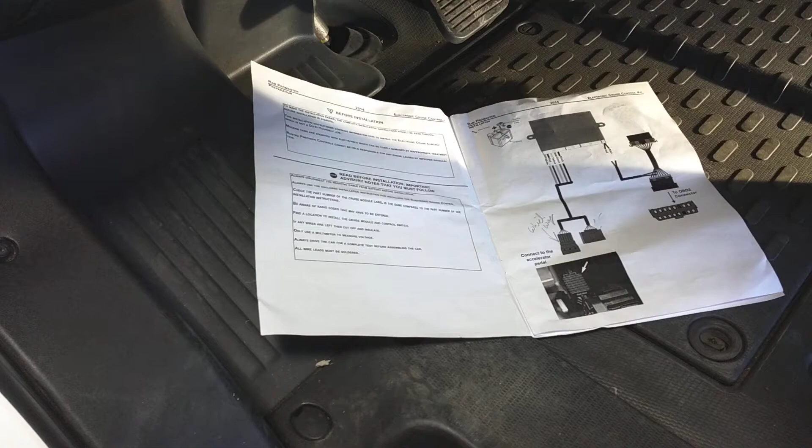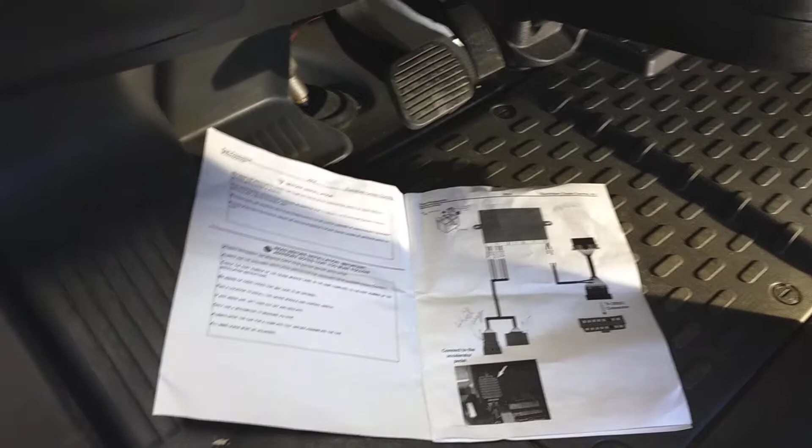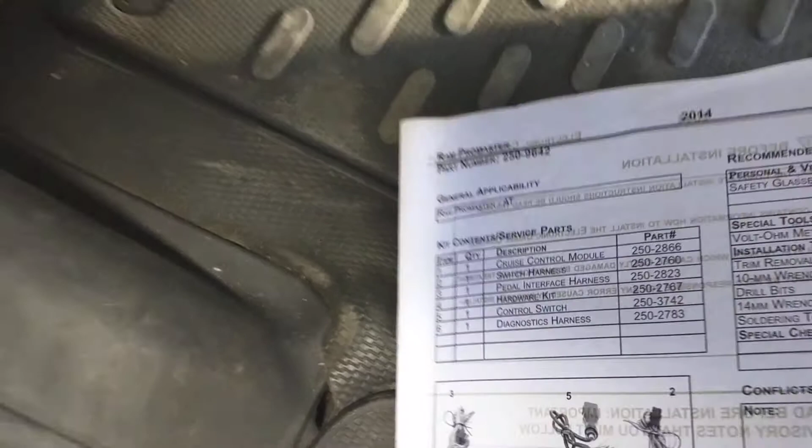Okay guys, I'm going to take a break from my ProMaster conversion. If some of you know what I do, this is a ProMaster conversion. I've installed this Rostra cruise control. There's a part number right there, and that is the number. Now most of these cruise controls pretty much all plug in the same way.

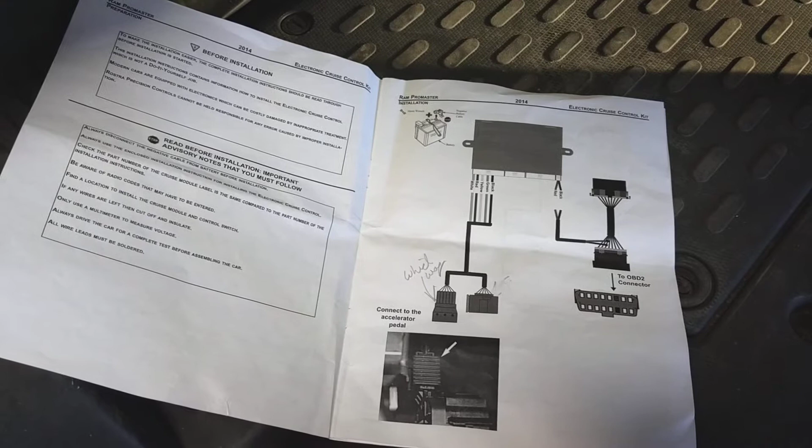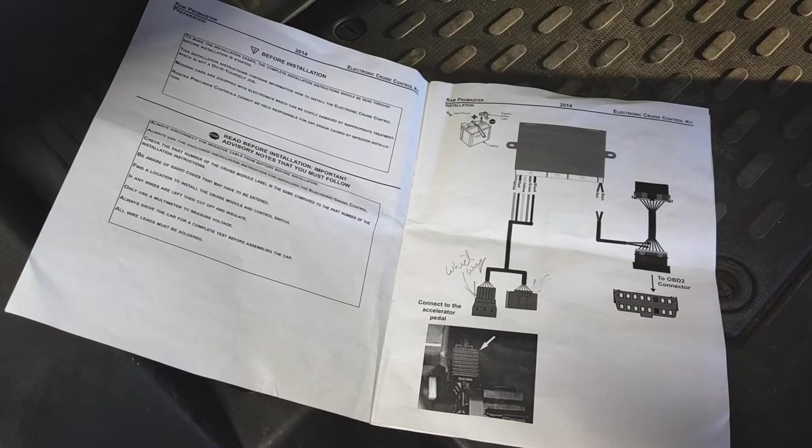I wasn't going to do this video, and I apologize, I've already installed this, but I became frustrated with the instructions, which as you know are terrible these days. I looked at a couple of YouTube videos, and sometimes I think these guys are either shills for the company, because they say it takes 30 minutes. Well, it took me a lot longer, and I had a lot of questions. I think YouTubers doing these are either shills for the company, or they want to show you how smart they are. So I'm going to try to answer some of your questions and issues I had installing this, and give you some tips and tricks.

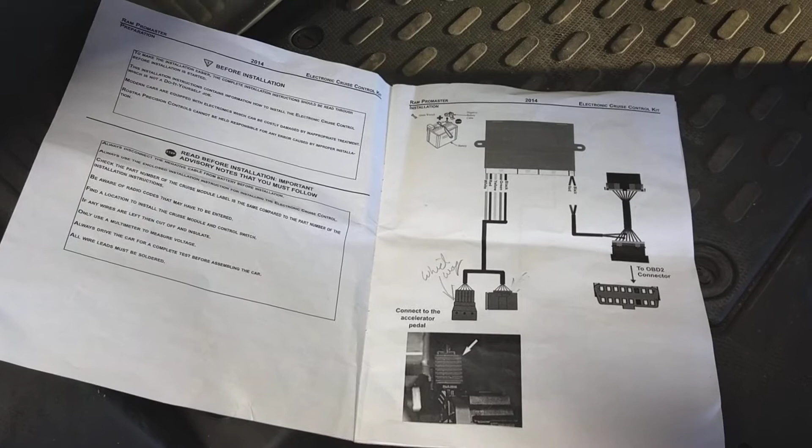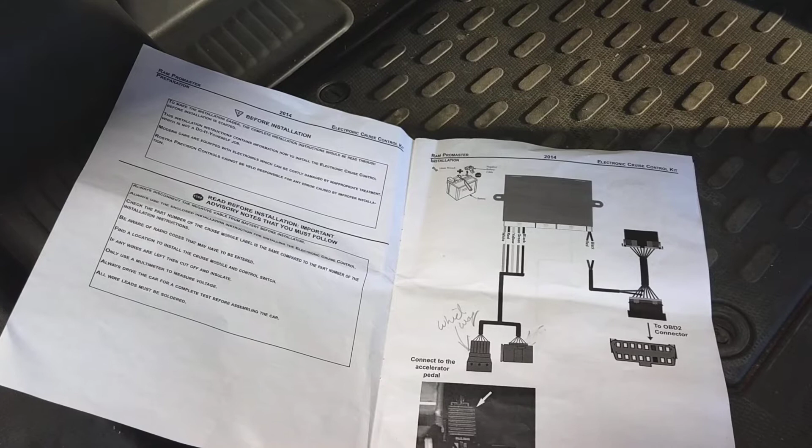Anyway, like I said, I've already installed this, but I think I'm going to be able to help you out on some of the issues that I had.

Here's the first tip. The first thing they tell you to do is take the battery out, or disconnect the battery. So you remove this cover, there's 6 plastic Phillips or flathead screws. Take those out, undo the battery. Big tip here: put this panel back in after you have the battery disconnected. I'm going to tell you why. After you've got it disconnected and the panel back in, there are 3 pieces you're going to need to remove.

One is this column up here. The reason I tell you to put that panel back in is there are 4 Allen screws — one here, and after you get this off, one here and one here. They're extremely hard to see, even with a pen light stuck up there — small Allen wrenches, and you know how easy those are to strip. You have to feel around: first you'll take this off, then this off, then the bottom one, and then this. Sure enough, these Allens are really small, and I dropped one while I had this off, and I was lucky it didn't fall into the battery compartment — they're dark in color, so really hard to see. So make sure you put that panel back, so when they do fall, you can retrieve them fairly easily.

Take a picture of the seams of the column here on each side, or make a good note of it, because it takes some fiddling to line this back up. It took me like 10 minutes because there are these little tabs up here that it connects into. So just be aware of that — that's a big tip. For the Allens, try to get a light up there and look at them; I think it's a 2 millimeter size. So that's a big tip right there.

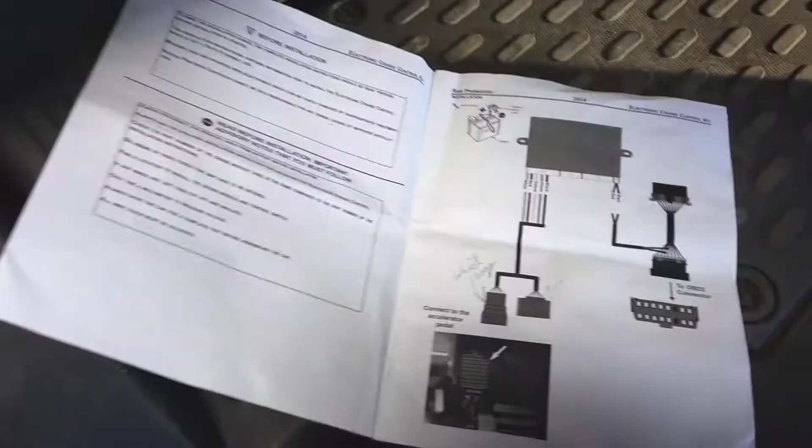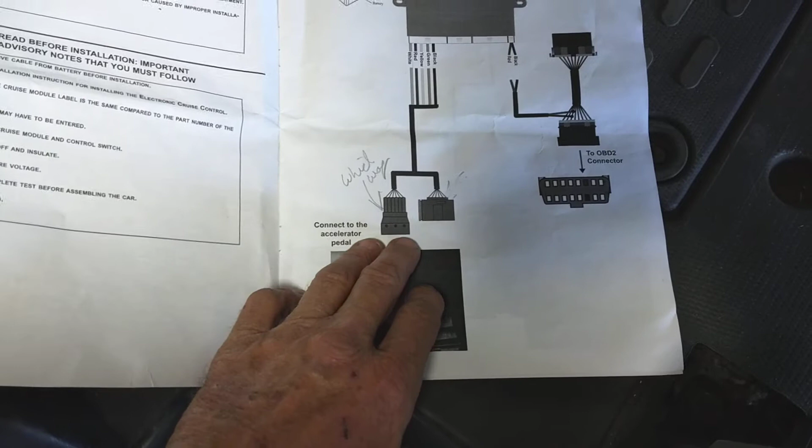Now, as soon as I got everything off, the next thing I did was look at the directions, and you'll get this control box, the black control box, along with 3 harnesses that plug into it. Before I did anything, I plugged in all of these, and I think that was a good way to go about it. So this is the accelerator connection — that's the new one, and that's the one your old accelerator plugs into, and it plugs in here.

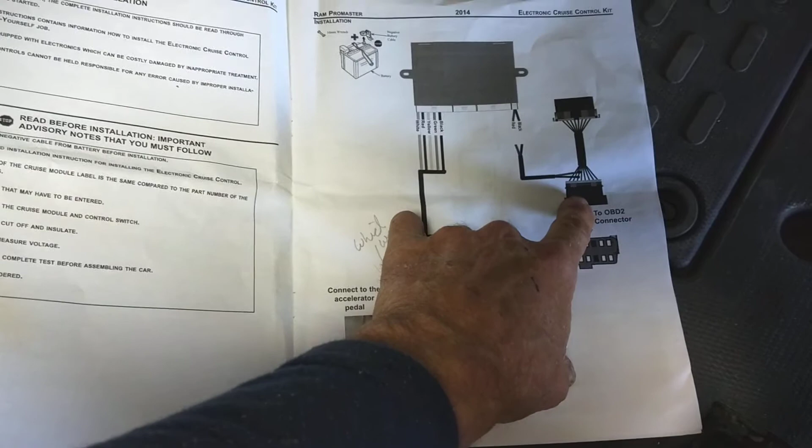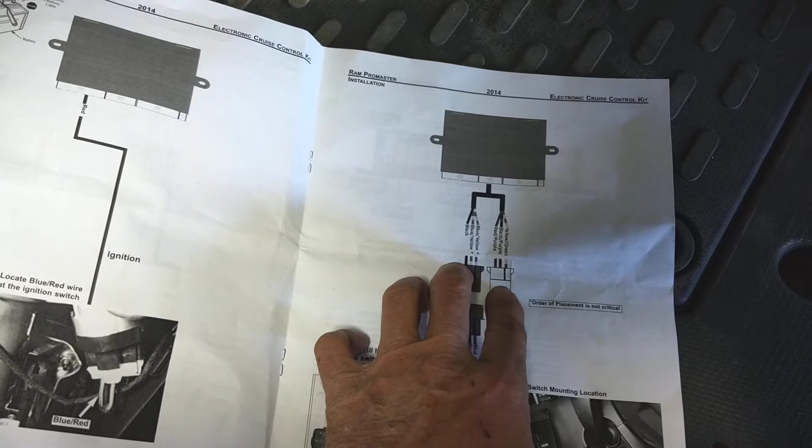Just line it up, it only plugs in one way. Then you got this OBD connector, it plugs in over here, and you'll have one more. It's a Y connector, right here. It only plugs in one way, and then you've got these two, a white and a black connector, that will go to the controls of your cruise control. So you have three harnesses connect into this: one I just showed you, this one, and then the OBD2 over here.

So do that, keep your wires all out of the way, and then you can get up and figure out where I mounted this control box right here.

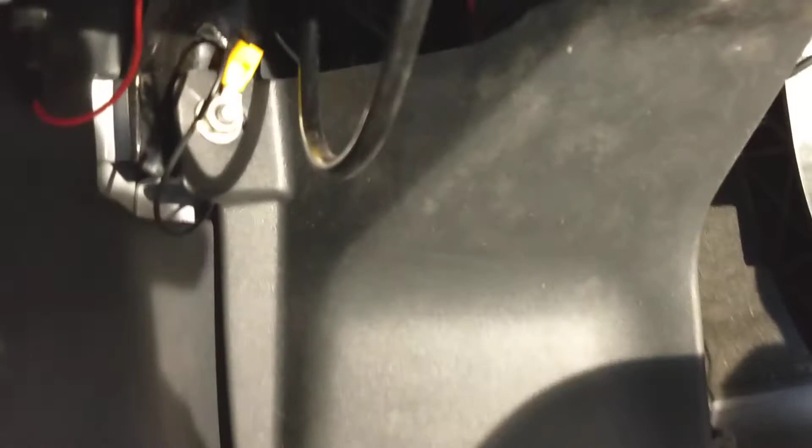So the first thing is, I got up under here, and the third cowling -- before I go into that, I took off this one right here. There's an 8 millimeter bolt up here, a screw over here, and a screw right down here that you pull off. You kind of wiggle this a little bit because there's a tongue here, and it'll pop out, sort of like a protector rest so your foot doesn't go back onto this control arm over here.

So take this off, and the reason is I mounted this black box right here per the directions, right up in there. I don't know if you can see it or not, but right up in there.

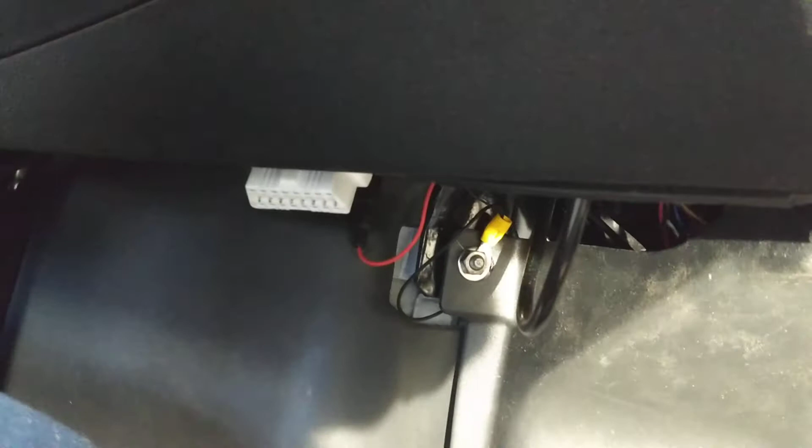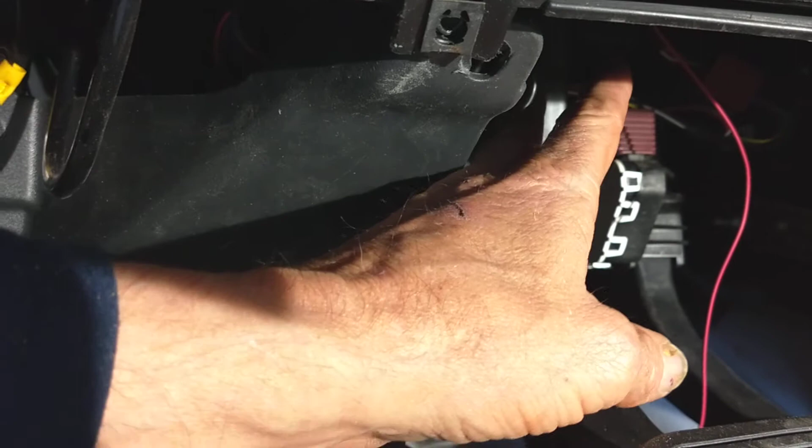The first thing, once you got that mounted up there, you're gonna have a bunch of loose wires. Make sure you zip tie them up here. Now here's the red wire too -- this is the only loose wire that comes off of that control box right over here, and it will show you the red wire. That's going to be the power that goes to it.

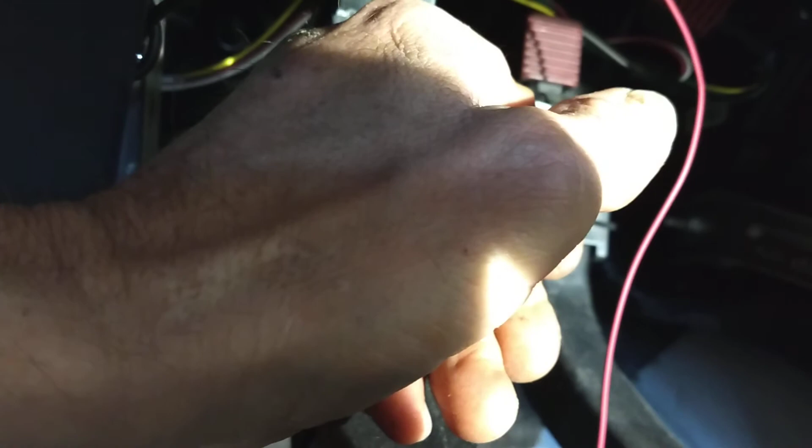Now if you look, here's the new control they give you. This pulls out, it just kind of pulls out with your thumb and index finger fairly easily. Unplug it, and that will plug into kind of the dummy one they give you. The question I had was, which way does it plug in? It doesn't make a difference. The new one plugs right up on top -- this is the new one, and it pushes in just like the old one comes out. You pull it, pop it out, put the new one on, push it in, and it gets locked into place.

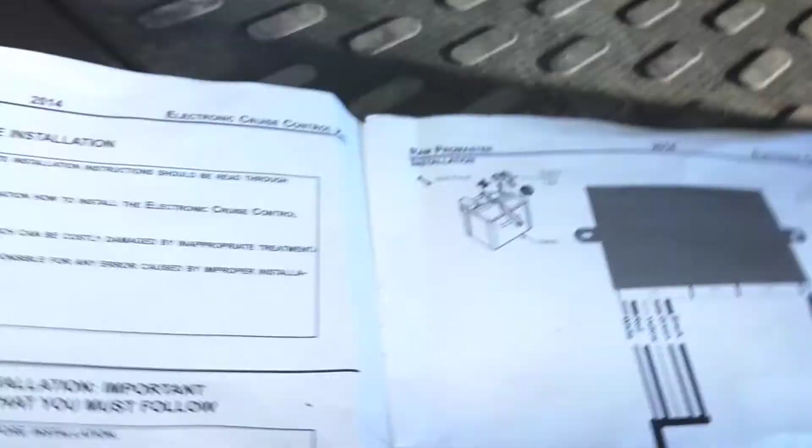So that's a big question -- I'm like, well, which way does the old one plug into this? And what it is over here, I think it's just kind of a dummy that it plugs into. I don't think it makes a difference which way you plug it in. So that's the new one that gets plugged in.

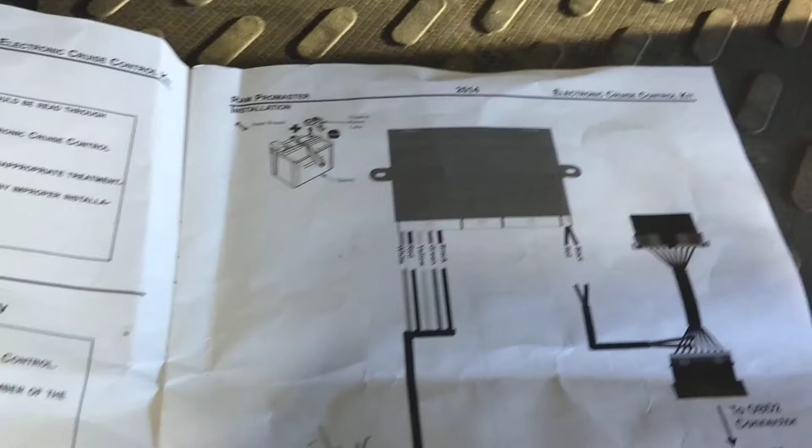Then once you got that plugged in, go to your OBD connector, which is right over here, I'm showing you. Once you take the fuse box off, it's sitting right up under here. This is it right here. There's two little tits here -- you squeeze them, pop out the old one, and put it back here, and the new one pops in. It plugs in, and it only plugs in one way into here.

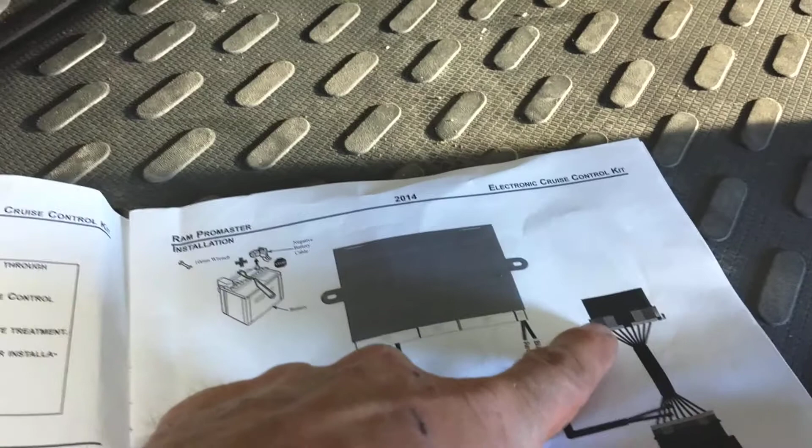So your new one snaps back into there, and your old one snaps onto this -- this is the new one, and your old OBD will snap into that. And this snaps right where it's white, and your other one is probably black in color. So that's that one, okay?

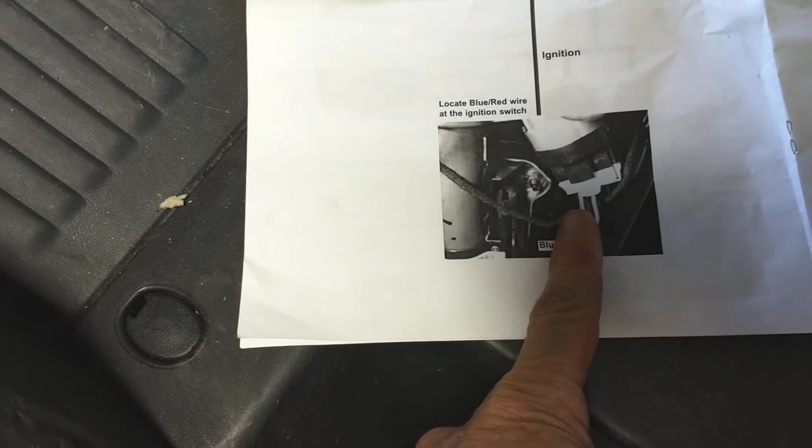So then you jump over, and you have these two right here. You don't do anything with those right now. So it's a nice place, like I said -- mount it behind that little footrest there, out of the way -- and then you can move on to the one issue, the big issue I had with the videos and these instructions.

So you've got this red wire, one wire loose here, this red wire. And all it says here is locate the blue-red wire at the ignition switch.

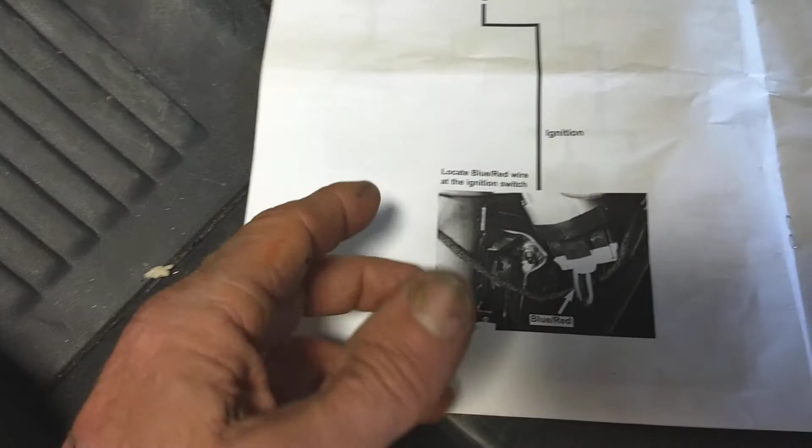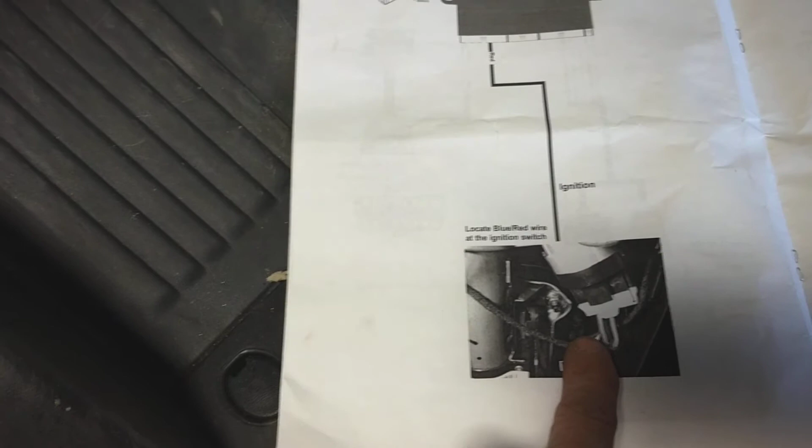It doesn't say to do anything with it. Even the YouTubers, one YouTuber said, 'off your ignition.' You're going to have an ignition switch right here. When you take this off, right up under where your ignition is, there's a white connector with two wires going to it. That's your ignition switch, right here. There's a blue wire, and a blue wire with a red stripe.

Now one of the videos say, well, you cut that wire. And I'm thinking, okay, if I cut the wire, which end do I connect the red wire that comes off the control box? Do I connect it to the one I cut, or the other one? Well, through trial and error, I realized you've got to connect it to all three of those.

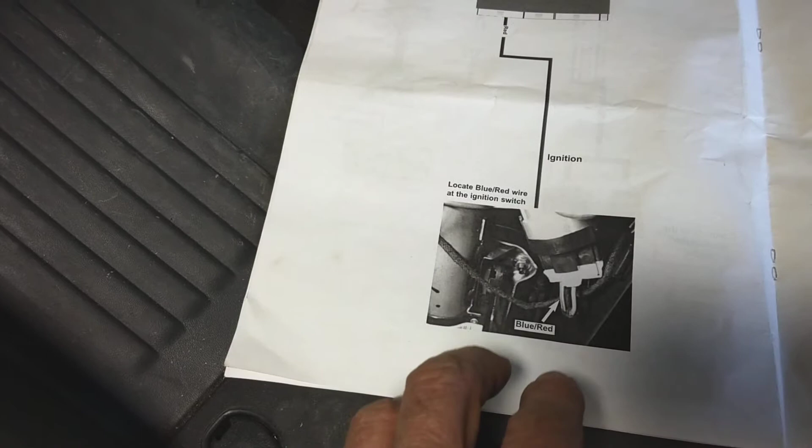So if you cut that, now you've got two wires, and you need to strip each one back about 3/4 of an inch, and connect them to that red wire coming down here. Now an electrical schematic would have a little dot there showing you that 3 wires are connected. But the instructions and the YouTube videos don't say anything about that.

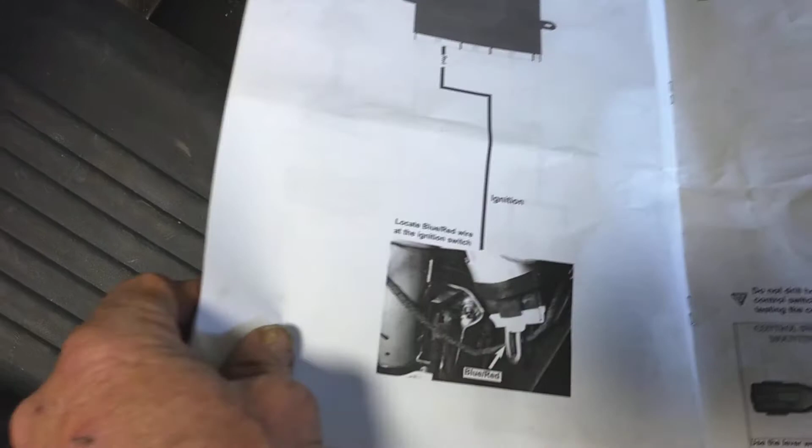So you have an option on this. You can either cut this wire, or try to finagle stripping it back an inch without cutting it, then solder this red wire, wrapping it around the bare wire, soldering it and taping it really well.

But what I did is I cut it, then you've got 3 wires - the red wire and the two you cut - strip those back, and I soldered them. You can imagine, being up in here trying to solder, you're going to drip solder on your hands, so you've got to be careful of that.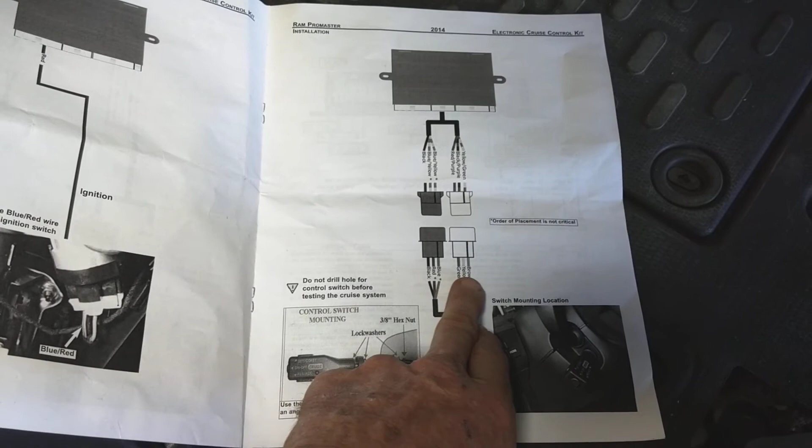So that's what you got. You've got to connect all 3 of those. That red wire has to be connected to this red and blue wire, and it has to maintain its circuit just like it was. Okay, then once you've got that, you're almost done.

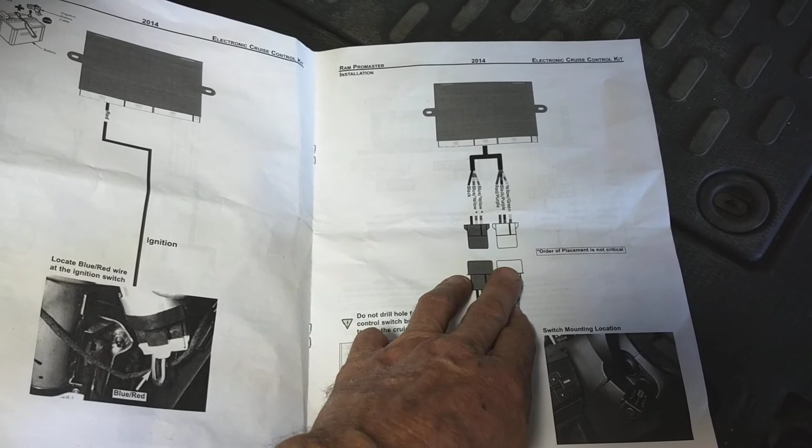Now, as far as your control arm, which is right here - use a 3/8 drill, because once you have this off, it comes away from your control arm here, and you just drill your hole here. Then you have these two connectors that are loose, a white one and a black one. Don't connect those to these wires yet.

This goes to your control arm over here. Feed those through that 3/8 hole, and then you can take those - believe it or not, they snap pretty nicely into these two things. You follow the directions on the colors of the wires, and the connectors will only plug in one way. That's kind of your Y harness that comes off of the control box, and those are your only wires that are left.

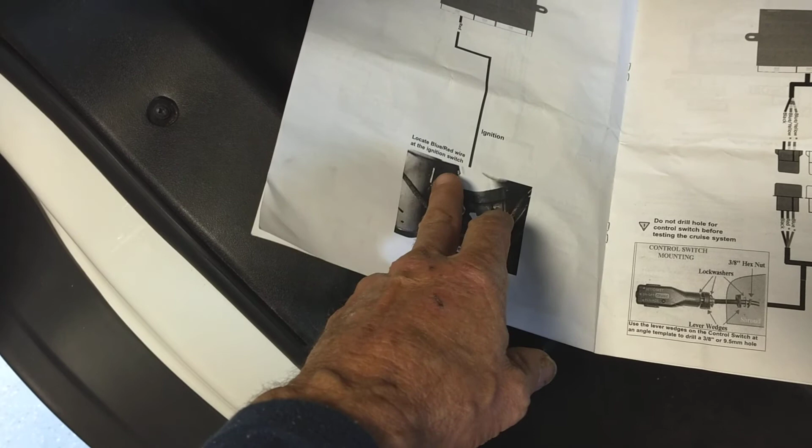And they only actually plug in one way. There's little notches on the bottom of these. Just make sure that they line up right, and these things snap in. Those are the controls for your control arm here that you're gonna do for your cruise control handle.

And that's pretty much this video. I hope that helped you guys. Like I said, that red blue wire is probably your biggest issue.

One other thing - you could probably wire nut those three wires on this, but that's probably not the best idea. Yeah, if you didn't have the capability, obviously that's what you have to do. Just make sure you get a really good connection on them, wire nut them and all that.